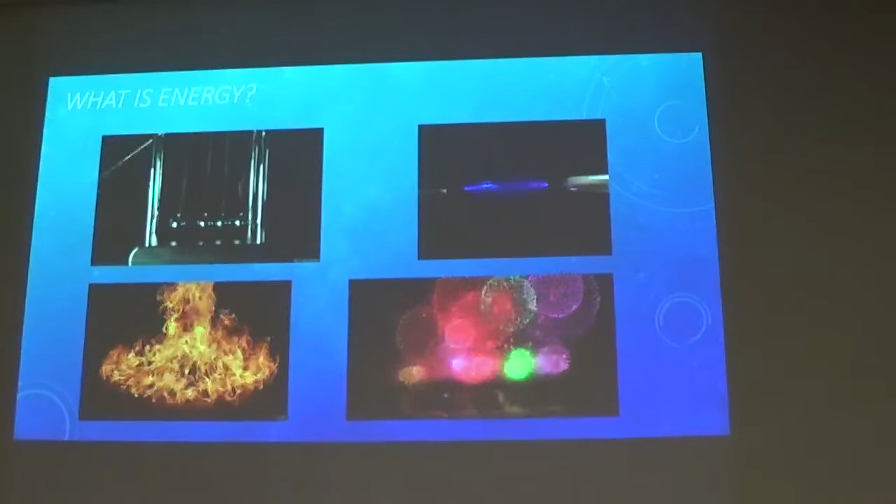The last one is a little tricky - plasma is a type of matter, fire is a plasma, it's an energized gas. Chemical energy is the energy that is bound up inside molecules and atoms when they bond together and the bonds break. The simplest example is the baking soda vinegar reaction. When you mix those 2 together, they release carbon dioxide gas, they release some heat, and you don't have baking soda and vinegar anymore - they've changed. That's the energy involved in chemical changes.

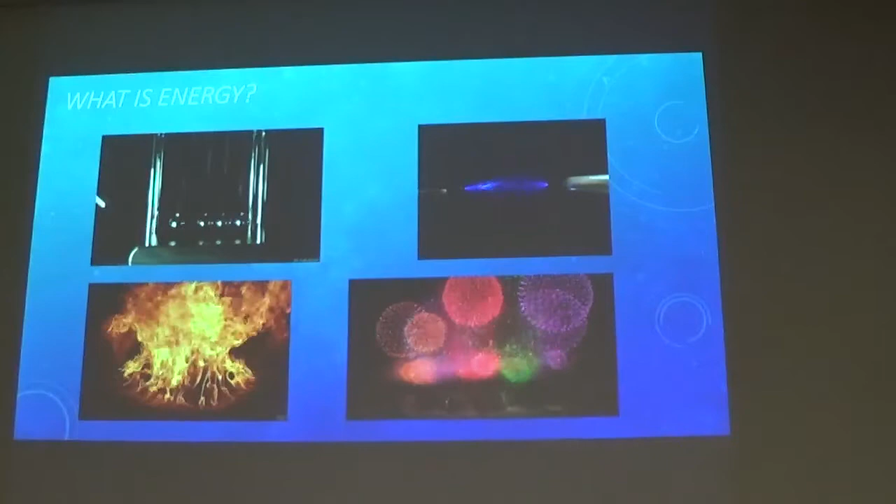Those 4 are very important to how we get our power in our house. So where does the energy in your house actually come from? Do you want to plug in your phone or watch TV or use your computer? Where is it in your house? You've got wall outlets. Everyone just sort of sees, you got a wall outlet, you plug it in, everything's great. But where does the wall outlet actually get its power from?

Through the power lines, yes. Yes, through the power lines. Hello, hi, is this audience? Yes. We're still at the beginning, nothing too complicated. So do you know where the power lines get their energy from? Is that what you were going to say? No, I stole it from under you.

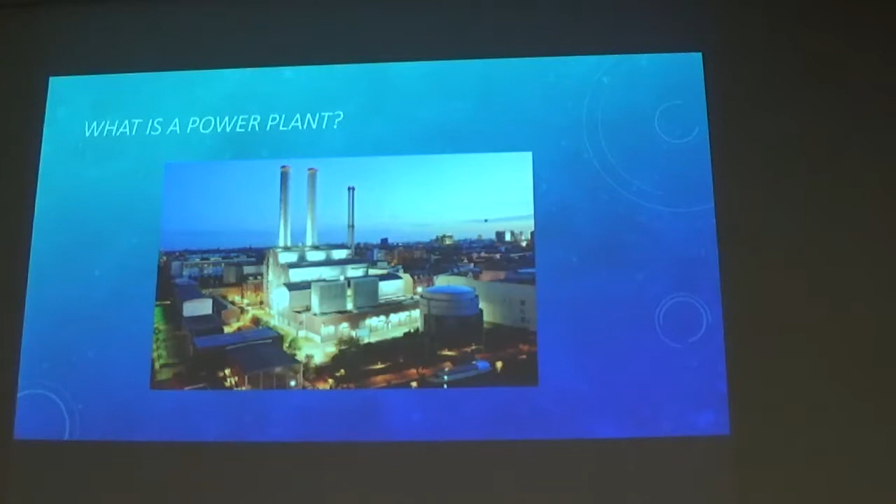Yes, the energy in your house eventually all goes back to a power plant. So what is a power plant? A power plant is basically an electricity factory. This is one, I believe, in Germany. It's quite new, quite clean, very modern. So how does a power plant work? What is going on in that building?

There are several different kinds of power plants. We're going to go over different kinds and describe how they work and what the breakdown is. This is an example coal power plant, a very simple one. Oil plants are similar, natural gas plants are similar - they all sort of start with a fuel. In this case we're using coal. The way that you get power out of coal itself is a chemical, or a set of chemicals.

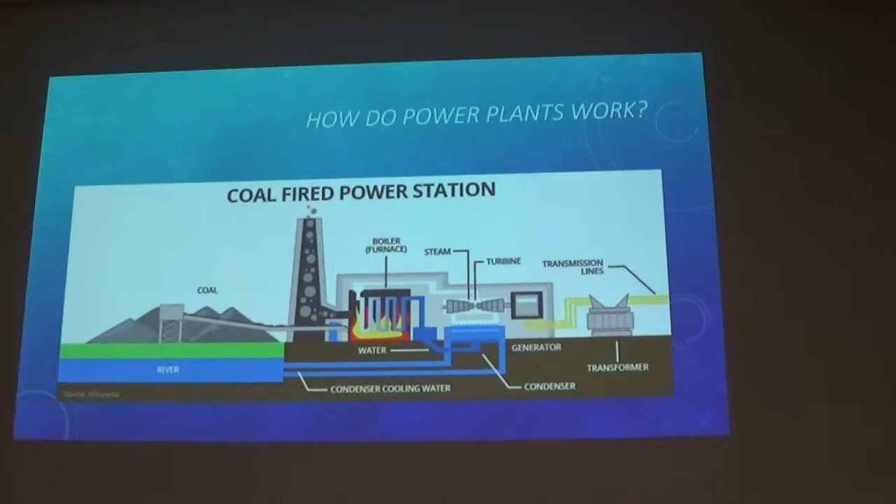Everything's made out of chemicals. All of matter is made up of things called chemicals. So if you ever hear anything about your food has chemicals in it, of course it does. Everything does. And what we do with this is a special chemical reaction called combustion.

If you've ever been camping and you're cold and you need some light, this is a very good way to get some. What you've got here is a hydrocarbon, which is a molecule of hydrogen and carbon. It's pretty simple, about the simplest thing you can burn. You combine that with oxygen, and you'll get carbon dioxide and water vapor.

If you've ever seen wood outside, you know that you put wood on the ground, it's not going to burst into flames. You have to get it hot first. So that's part of what goes on here, you have to heat this up. And as long as you have heat, fuel, and oxygen, the fire's going to keep going.

If you throw water on it, that takes away the heat. If you throw sand on it, that blocks the oxygen. And if you run out of wood, then you run out of wood. So there's lots of different things that you can burn.

It's not a challenge, you don't have to try it. But there's propane, which is in your gas grill. You've got methane, which is very similar. And this is cellulose, which is a sugar. Sugars are used by plants and animals to get energy from. Essentially, they even come with the oxygen already in there, so it's very energy dense. It's easy to burn and gets you a lot of power when you do burn it.

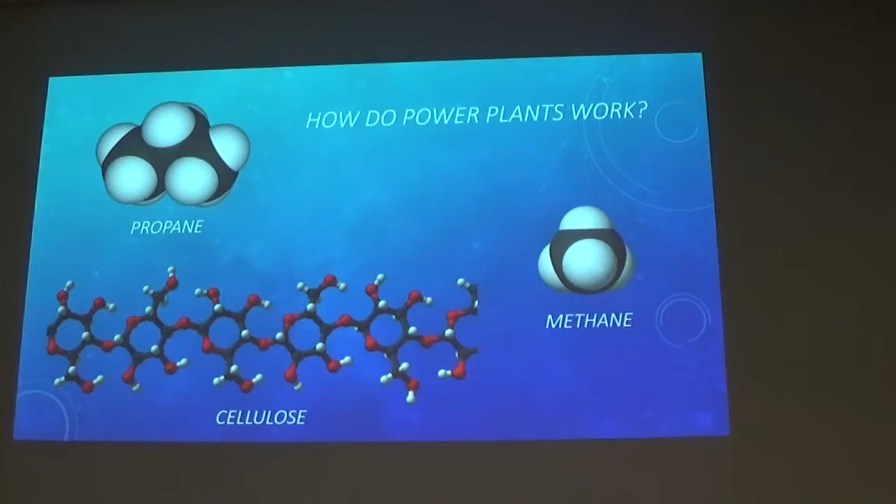So we've got over here, this kind of spoils it a little bit. We've got the furnace here where we have a fire. Hey there, sorry, we're not too far in. It should still make sense, I missed the important parts at the beginning.

So you just said cellulose is really flammable. Yes. Because I have cellulose insulation in my house, is that a bad idea? Blown cellulose, it's a process.

Okay, so this spoils it a little bit, but if you're going to try to make pasta, or you're going to make something on your stovetop, and you put a pot of water on a hot stove, what happens to the water?

No, this is very, sorry, yeah, in case you missed the beginning, it's very back and forth. So yeah, audience participation is encouraged. Yes, and you say, what? It does, yes, it will boil.

So what we're doing here is we are taking this chemical energy that's in the coal, and we are burning it, so now we have thermal energy. We've changed the kind of energy. You can't actually create or destroy energy, that's thermodynamics, you can just change what type it is. So we've gone from the chemical energy in the coal, and now we've got thermal energy over here. We're going to boil that water that's in this, we're getting it from the river, and it is going to boil over here. Yeah, here we go.

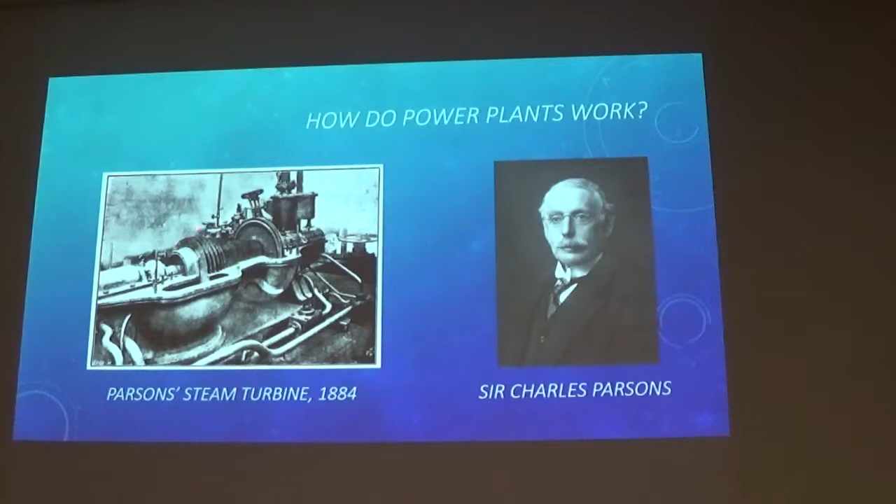So this is a very smart man, Sir Charles Parsons, from back in 1884. He invented the first steam turbine. Now what that is, is a set of these, they're almost like fans, you can kind of see them here. These all have rows after rows of blades, and what they do is they boil the water, and when water boils, it turns into a gas.

It takes up a lot more space. So if you have a small vessel that can only hold so much material, and you add steam, which takes up more space, it's going to increase the pressure. So what they do is they take that pressure and blow it across all of these fan blades. This is actually moving, it's hard to see, but all of those wheels are going to spin, and they're going to move that central axle.

Does any water touch the turbines, or is it all steam? There probably is some condensation. I'm not sure exactly how hot they get the steam before they put it in there, but I think the idea is to not have it cool down. So this over here, the condenser, that's where you're meant to cool the steam down, so that's where it turns back into water. So it shouldn't be getting too wet.

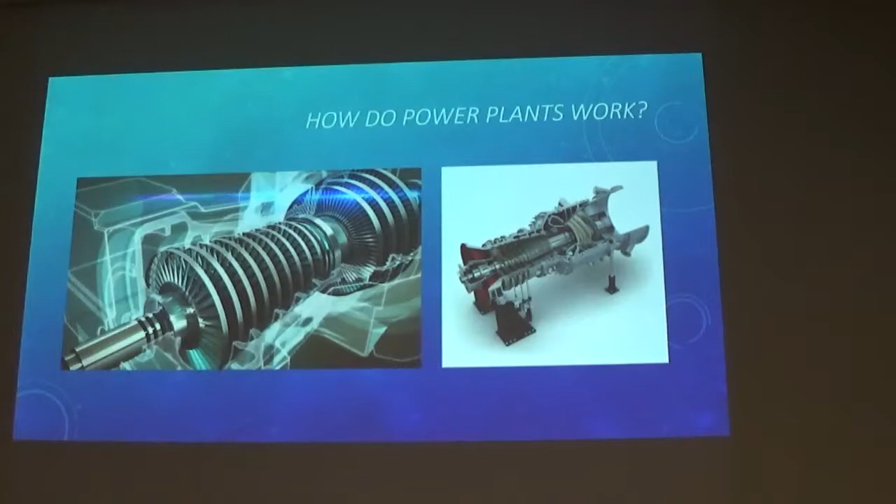It's all very hot. So what are we going to do with this spinning axle? We initially had coal for chemical energy, burned that to get thermal energy. Now we're spinning this turbine to get the energy of moving things. Now it's mechanical - we have stuff moving, we've got this turbine spinning.

This man, Michael Faraday, you may have heard of him. If you've been to the Museum of Science lightning shows, they talk about him during that - he's very important to the lightning show. He discovered, back in 1831, that if you spin a copper disc in between magnets, you actually get electricity moving through this wire, because I mentioned this in the beginning, electromagnetic energy - if you have moving magnets, you're going to get electricity. If you have moving electricity, you're going to get a magnetic field. So he found out that you could actually get one from the other.

So he was able to take mechanical energy of a spinning disk and turn it into electromagnetic energy, which is very useful. Now we've made better versions of Faraday disks. His was maybe enough to power something like a Christmas light for not very long - they weren't producing a lot of electricity back then. Now we have to provide power for people's houses, and that's a lot more effort.

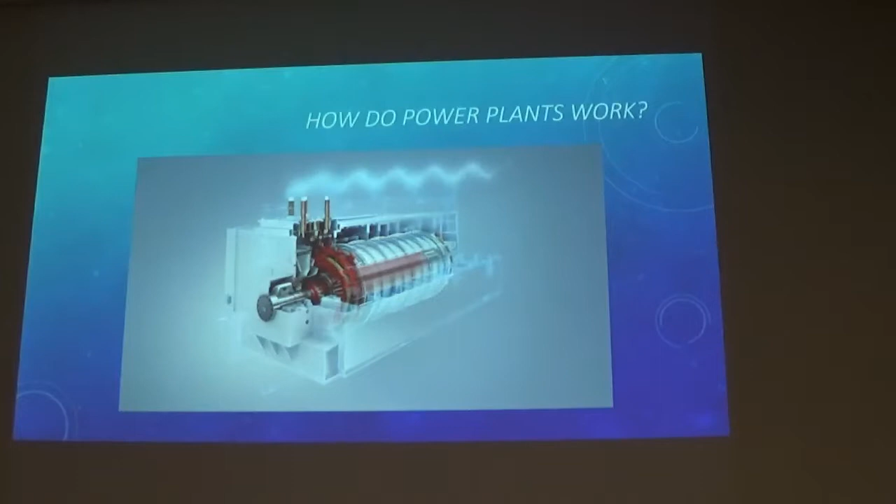So this is, I believe, called an alternator. The newer ones actually have a new name. There's one in your car if you have a combustion engine car - if you have an electric, you do not have an alternator. And so that's the breakdown: we got chemical to thermal to mechanical to electrical.

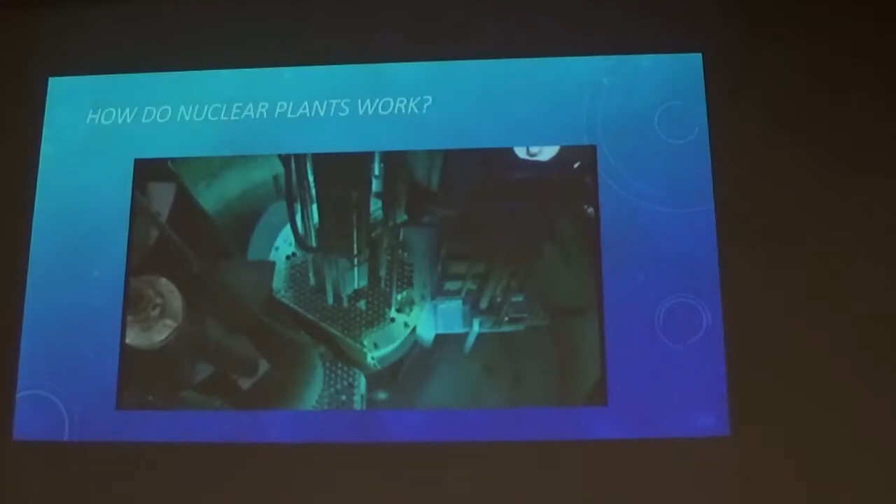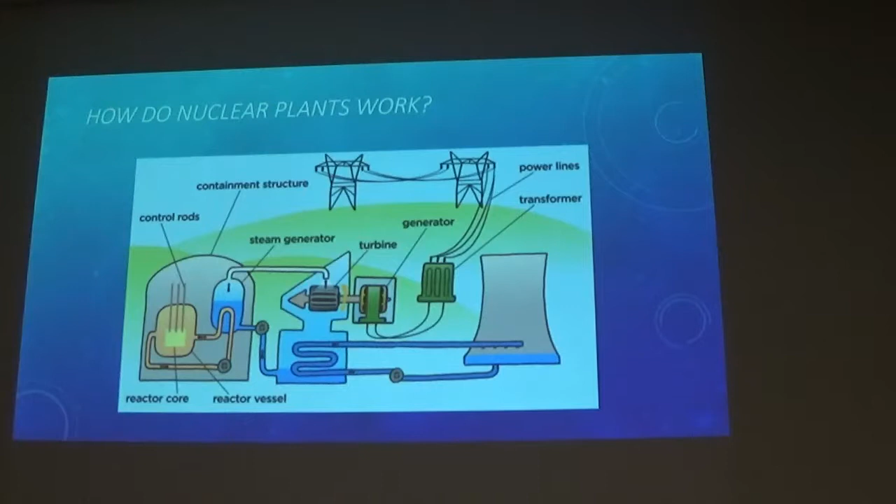There's one other kind of plant that operates mostly the same way once you get past the beginning, and that is the nuclear plant. There's one up in New Hampshire, not that far, and they work very similarly. So you see, we still have the generator, we still have the turbine, we have a boiler over here, boiling water, it comes around. The only difference is how we get heat out of the fuel, which is uranium for the most part.

So who's heard the word isotope before? Oh, excellent, I have less work to do. I'm sure I have, but I probably forgot - yeah, it's one of those things that doesn't come up too often.

So the number of protons in an element determines what element it is. If you have 92 protons, it's always going to be uranium. There are electrons flying around the outside - they don't determine what element it is, they determine what ion it is. We're not using ions. What we care about is the isotope, which is how many neutrons there are. Neutrons are neutrally charged - protons are positive, electrons are negative, neutrons are neutral. That doesn't mean they have no charge. They have a positive and a negative, and they kind of don't really know which way to go, because they've had some of each.

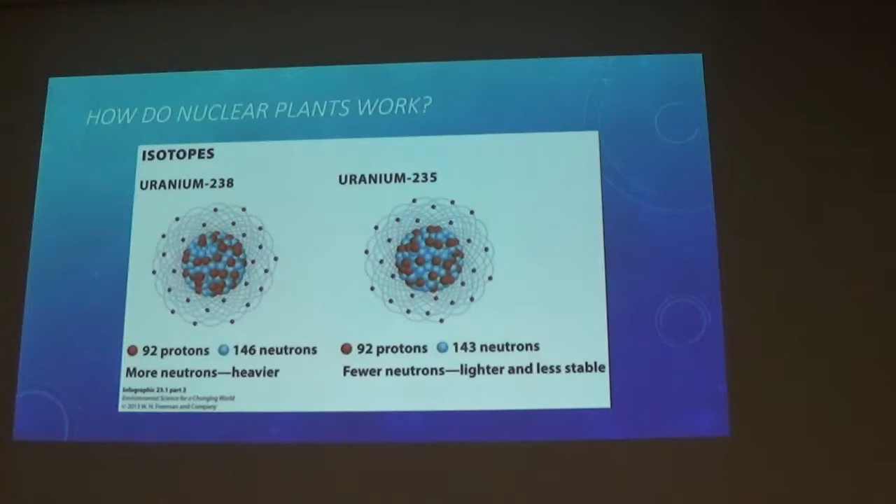So this number up here, the 238, is just 92 plus 146. This one, uranium-235, has fewer neutrons, and it is lighter and less stable, which means that if you smack it with another neutron, it turns into uranium-236, which basically explodes immediately. It's extremely unstable. It fractures into a couple different pairs of atoms, so all that has to happen is that this number down here, for krypton is 36, for barium it's 56. Those just have to add up to 92. We don't care what they are.

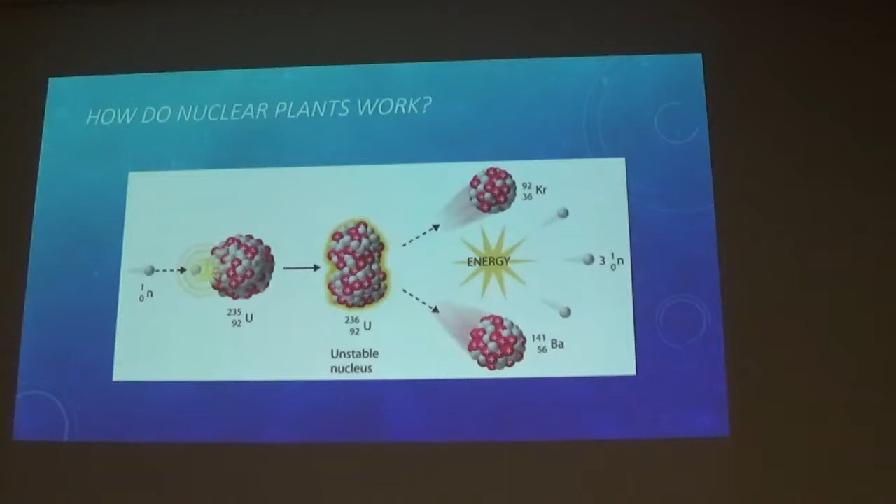It's like if you try to break a cookie in half, you're not quite sure where it's going to break - there's a couple different options. And it releases a lot of energy as heat. Everything gets very hot when this happens. And you get more extra neutrons that fly out and hit other uranium atoms. So that's called a chain reaction - that's a phrase that you will hear about other things, but that's what originally a chain reaction was.

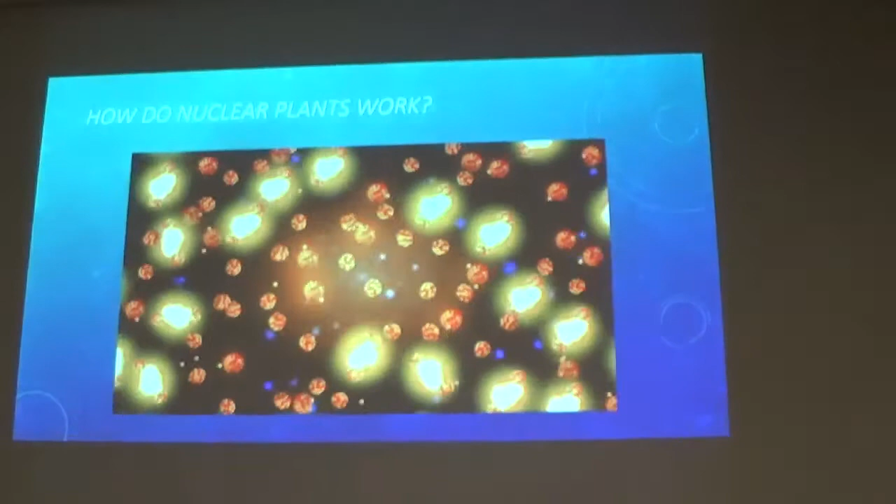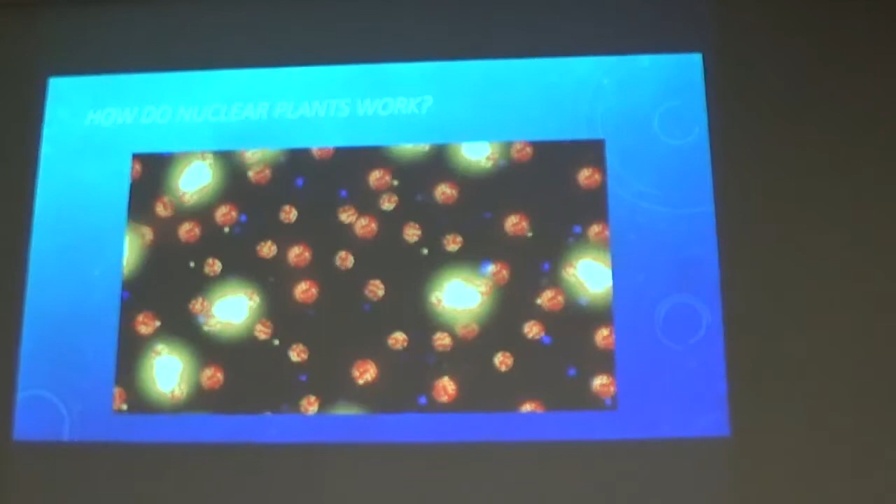So the neutrons fly out, hit more uranium atoms, then more of them fly out, and they use control rods that block the neutrons so that they can keep things under control where they want it. They don't have any disasters. This is just to show you, there are all different combinations you can get of different elements that add up to 92.

Has anyone heard of the term half-life? And do not say the video game. Yeah, yes, so that's a thing.

Half-life is a lot of the reason we care about the dangerousness of spent nuclear fuel. When we burn that uranium and get all those other elements out of it, it's still radioactive. It's very dangerous, it's toxic, you can't even really go near it. You don't have to touch it even, just going near it is a bad idea. Half-life is why it is so dangerous. Half-life is the amount of time it takes for half of your radioactive stuff to decay into something less radioactive. So from 1 to half, half to a quarter, quarter to eighth, it's the same time period. You never quite get to 0, but it gets there pretty safe eventually.

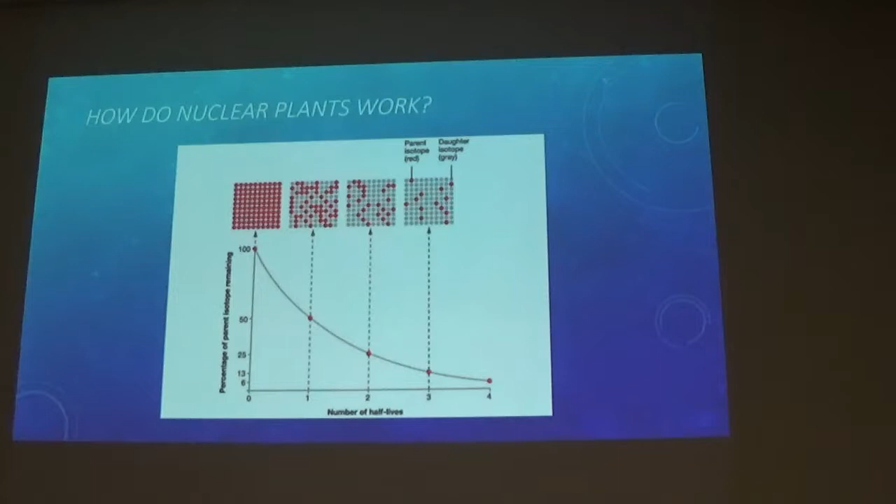The reason those are concerns sometimes, I'm not going to go into all of this, but you can see examples here: uranium-238 has a half-life of 4.5 billion years, which is a little bit old. So of all the uranium that existed when the Earth formed, half of it is gone. It's decayed, first it goes to thorium. Thorium's half-life is 24 days, so there's a big mismatch there. You get these elements decay along this chain, and they're very, very different - 4.5 billion years, 22 years, 1,600 years, 27 minutes for some.

1/1000th of a second for polonium-214. It barely exists for even an instant, and then it immediately transitions away. So the problem is that some of these things hang around for a very long time, and they stay dangerous for a very long time.

Do you want to take a picture? No, go ahead.

So what happens, the way this works is, you can see these alpha and beta symbols. If there's an alpha, that's alpha radiation, which means the atom just threw away 2 of its protons and 2 of its neutrons. So it changes elements, it goes from uranium to thorium because we have a different number of protons now. Since we don't have 92 protons, we're not uranium anymore. When you see beta, that means the atom has thrown away an electron, but it didn't have an extra electron - that's a neutron becoming a proton. So you've gained a proton, and you change elements again. So you can actually go from uranium back to uranium - it's just a different kind of uranium.

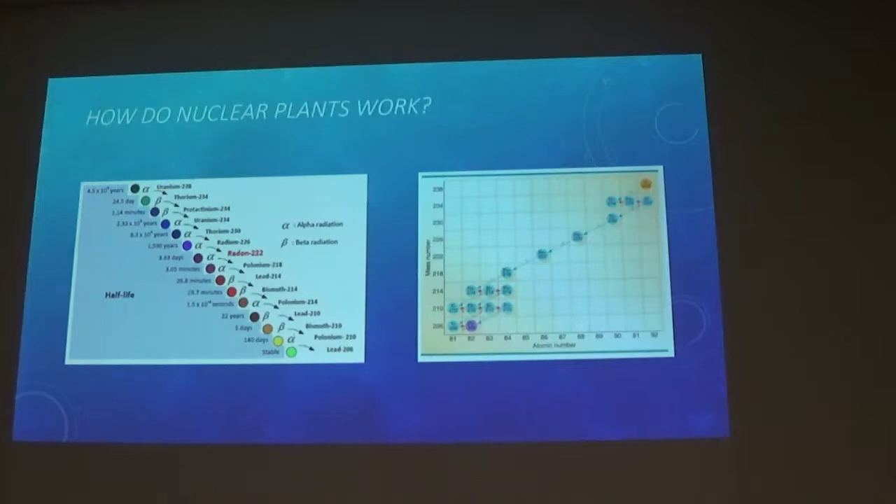Alpha particles, I think, are the easiest to block. Alpha radiation is blocked by a piece of paper. Beta, I think clothing will block it. It's not that deadly. Gamma radiation is the kind you have to be afraid of. None of these do gamma. That's not in this. I think they do make little diagrams like this that show you what type you're getting. Gamma is just a giant burst of energy that is not friendly to anything. You will not become the Hulk if you get hit with gamma rays. You'll just be very upset.

Oh yes, renewable energy, renewable in this case. So I'll explain it a bit with an example: coal. This is how coal is made.

So if you have a swamp with lots and lots of wildlife, there's lots of trees, lots of vegetation, and a lot of water. Things that die just sort of fall into the water and pile up and decay to a point, and more trees come in, and more trees fall down, and more grass grows and falls down. There's a lot going on in wetlands, they're very active. There's a couple state parks up north in the North Shore where you can go see this. It's actually really nice. You can get this stuff called peat when that piles up enough. They use it in their fireplace in Ireland, if you've ever been - it has a very distinctive smell.

So if you bury peat deep enough and wait long enough, you need a lot of pressure and a lot of heat that you only get from being deep underground. You eventually get lignite, which is a rock - it's actually stone, that peat has been compressed enough that you have actual rock now. And if you wait more time and give more pressure and more heat, you get coal.

The trick is this time bit. So if you decide you want cookies tonight at 7, I'm going to have to start making cookies at probably 6 because I have to mix everything up, warm up the oven, put everything in the oven, and then wait for them to be done. It takes some time. So if you want cookies now, start an hour ago. If you want coal now, you would have to start about 250 million years ago. So if you did not start your coal a long time ago, you are not having new coal today. It takes a long time to get this stuff.

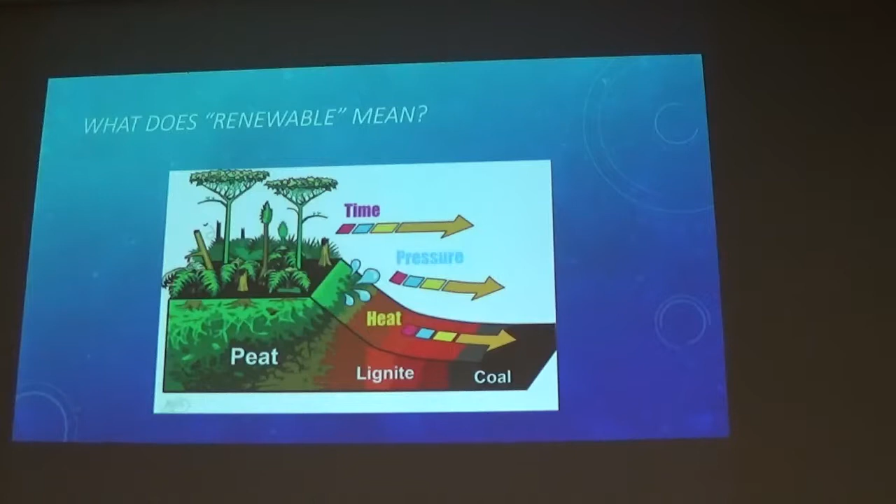Renewable just means we're generating it faster than we are able to use it up. So if you have a rain barrel in your backyard and you only use about half of it every time it rains, and you're topping it up every time, it's not telling you to use more water. But if you watch what you're doing and you're careful and you don't go crazy with it, you can probably just keep using that water and not have to worry about where you're going to get more.

So if we wanted to use the old model of power plant that we had, where we were burning coal - is there anything anyone could think of that we could burn instead of coal? It would be a little bit more renewable.

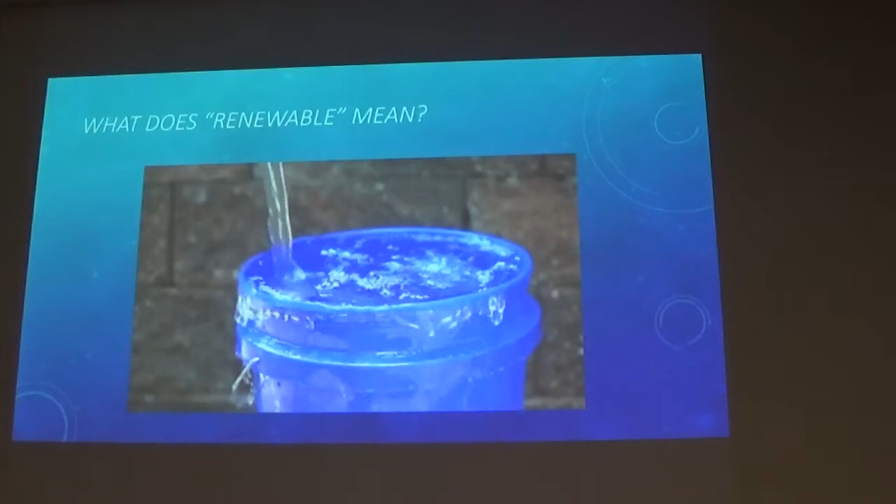Oil takes a long time too. Oil is also a fossil fuel, so oil, natural gas, and coal all take a very long time. Probably wood, wood is a good one.

Water. Yes. Water doesn't burn. Oh, sorry. No, you were looking at water. I can see why you would say water.

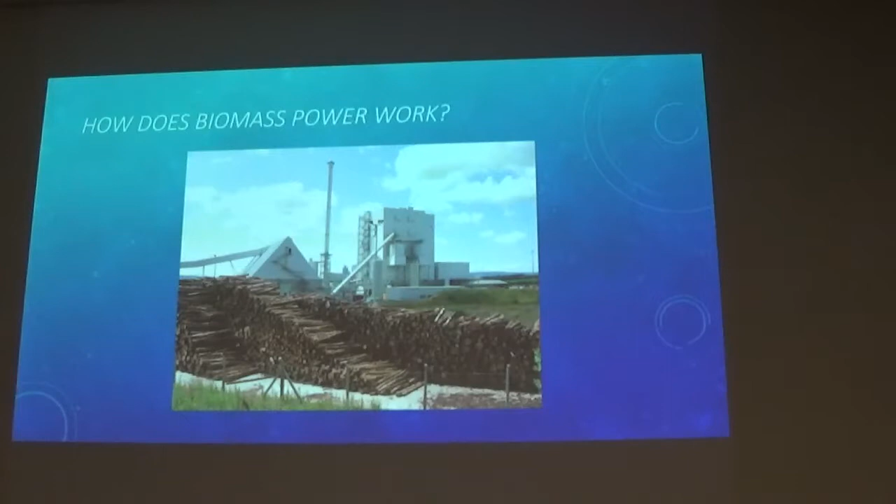So we refer to wood in this case as biomass. This would be a biomass plant. And what they're able to do is gather up all kinds of extra garbage plant stuff that we're not going to use. So at farms, they can say, oh, we have extra corn stalks, corn cobs, all these things we don't need, we stick them in a bag and ship them off to a plant.

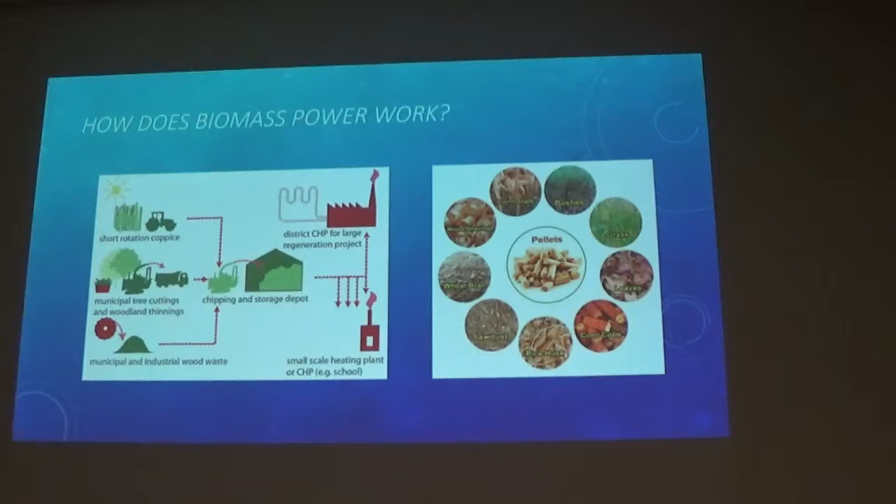If you ever had to rake leaves, mow the lawn, or trim the bushes, now you got sticks and everything, you just put them in a bag and the town takes them away. They can take it to a biomass facility. If you have a wood shop, you're going to have a lot of sawdust and wood shavings, so you can use those, and they compress them into little pellets that you can burn more easily, and you put them in a stove. And a lot of people will say, well, if you're burning stuff, you're going to get carbon dioxide, and that's what causes global warming, right?

Yes, but the thing is that when we are burning fossil fuels, which are coal, oil, natural gas, those were buried, those were out of the picture. They were way, way underground, and they weren't moving around in the air. They were completely out of the picture.

Trees are actually made of air, which the first time someone said that to me, it blew my mind a little bit, but trees do photosynthesis in their leaves. That's what the green color is for. It's from chlorophyll, which plants use to take carbon dioxide from the air, water from rain from the ground, and sunlight, and they create tree out of that. Wood is just solid air, which is kind of crazy, but that's how it works.

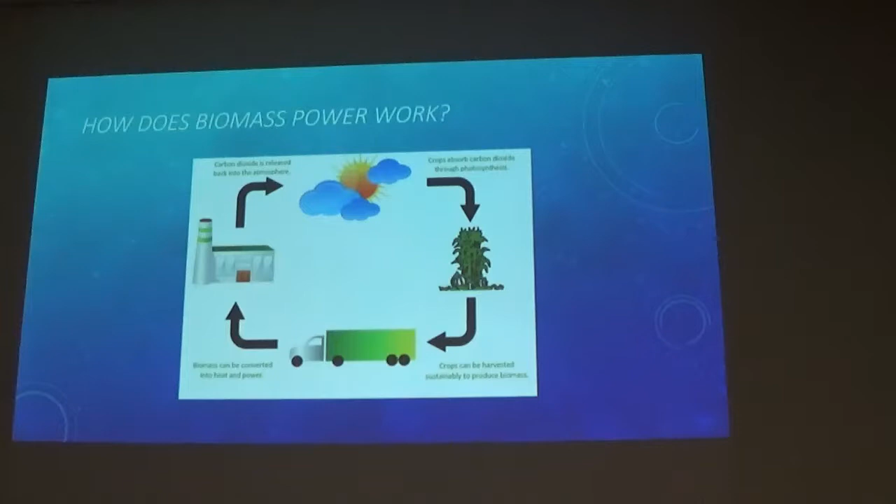So when you burn a tree, or what's left of it, say a tree falls down in your town after a storm and they put it through the chipper, now they're just going to throw it away. What we want to do is take that and use it before it just rots, because that carbon is going to go back in the air anyway when the tree rots. So we're thinking, could we just use what's already here? This energy is just waiting to be used and nobody's using it, so let's give that wood a detour instead of having it get eaten by fungi or bacteria or termites. So we're going to try to use it when it's already there.

A plant like this is not going to power a giant city. You're not going to power a whole state with one of these. This could be like a municipal plant in your town. You could just have this, everyone brings their yard waste, the dude with the wood shop brings in his sawdust. And we're looking at ways to take a little bit from a lot of different places, which is what we're looking to do in the future with energy.

So what he said before, when you switch types of energy, you're kind of losing some efficiency there. When you go from burning something to using that heat to boil water, what if we didn't have to ship fuel? What if we didn't have to pay the driver of the truck? What if we didn't have to mine anything or gather anything? Does anyone know another good way to just get heat? Anyone think of anything?

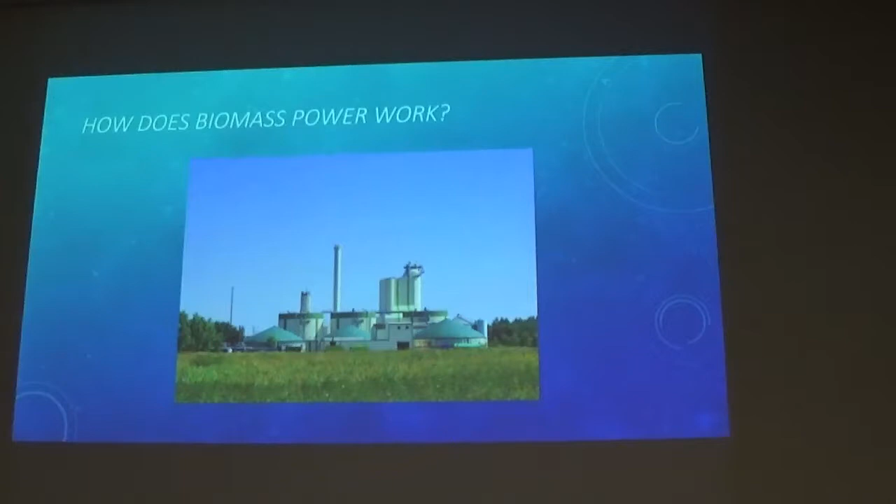So who's been to the beach this year? Yeah, so what happens when you go to the beach, you sit under the umbrella, you're having a great day, and then it gets to be late, and you go back to your car that's been sitting in the sun all day, and you open the door, and then you want to die because it's like 150 degrees in there.

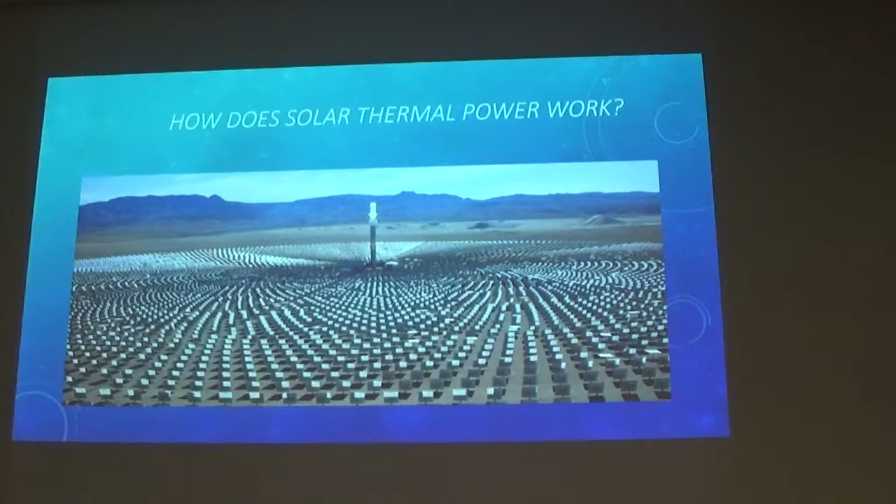That's how we get heat into a solar thermal plant. It's essentially because of the way glass works. Sunlight can get through glass, and it heats things up inside your car - your seat, your dashboard, your steering wheel. The heat can't get back out because your car is pretty sealed.

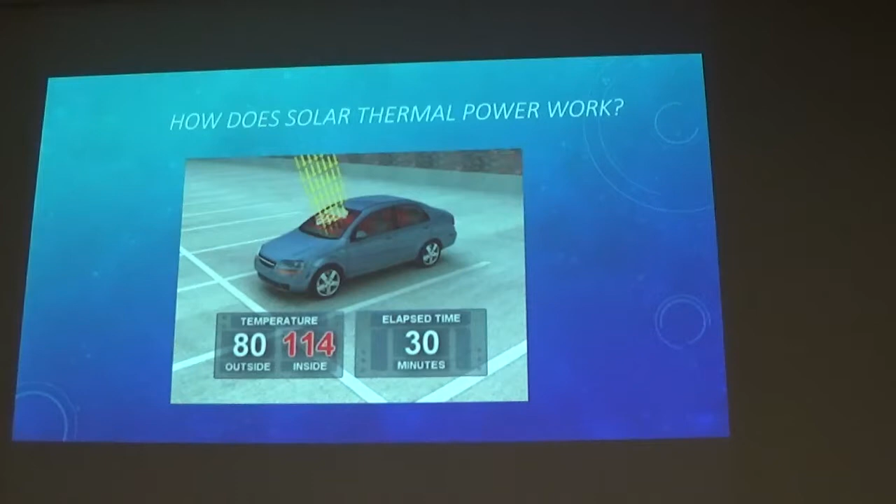That's why leaving your windows open a little bit helps, because that heat can kind of escape. But you can see within an hour it gets to be ridiculous. That's why you can't leave kids or pets, or if you bought a really nice plant and went shopping at the supermarket, you're probably down a plant. That level of heat is not good for anything, but it is good for boiling water.

So heliostat just means - helio means sun, stat means stay. So what that mirror does is, with a little computer in it, make sure it is always aiming the sun's reflection at that tower. There's a whole field of these, all pointing the sun directly at that central tower right there. And that gets very, very hot.

You can't go up there while these mirrors are all aimed there. If you threw a baseball up, it would just burst into flames. That's not a good thing to do with a baseball. So what they do is they aim all those mirrors up there, and it gets very, very hot.

What they could have done was put a boiler up there since it's hot - you can just boil your water. Then someone very clever said, well, hey, what happens at night? There's no sun. And they were like, oh right, we spent all this time and money building this big fancy thing - seems like a waste. So some chemists came up with using molten salt.

This is a mixture of a few different kinds of salts - I think there's potassium, there's sodium in there. These stay liquid at very high temperatures; they don't like to boil. When you put water up and get it to 100 degrees Celsius, it'll boil, but this salt will not boil. I think it can get up to thousands of degrees in that tower before this salt still does not boil.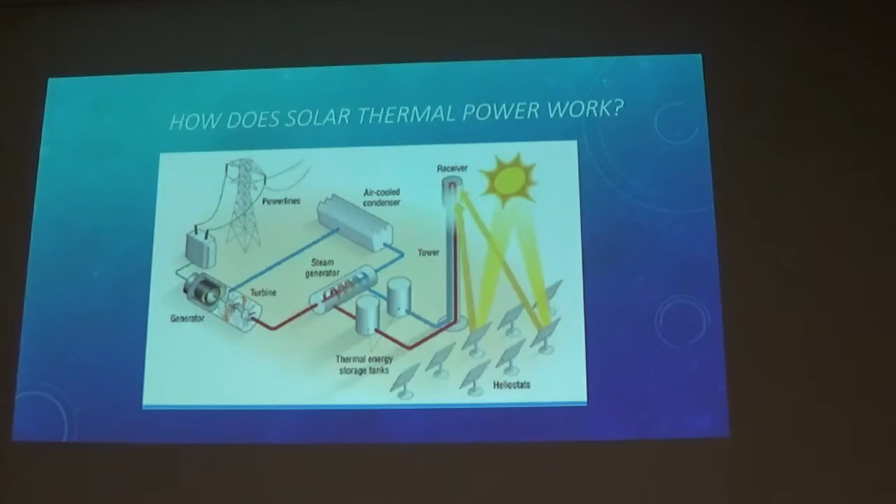These are really cool looking. Yes? If energy is lost from the efficiency of shifting between different forms, why is it necessary to have so many different forms?

It's just sort of how things developed. It was less high tech to figure out how to burn coal - that was an easy step. Everyone knew you could burn coal or whatever you're burning and get heat from it - you can feel the heat from the fire. They discovered the other steps later as they were going.

Somebody realized - Michael Faraday realized - I can spin this disc and get power. And people were like, well, how could we spin the disc without us having to do it? Because you used to have to do it by hand - he turned a crank, and he was turning a crank for maybe enough power to power a Christmas light, just sitting there for hours not really doing anything. So they were looking for how to do this without us having to do it.

So that's how they sort of came up with those steps. It wasn't all designed at once. It's sort of - the engineering word for it is a kludge, when you're sort of like, well, I have to do this thing, and it's kind of like MacGyvering something.

You know, if you know what that means, to just throw together something with what you have. That's kind of how that happened.

With solar thermal, you need a big, wide, flat area to put it in. You don't want trees because they block the sunlight. You probably want a flat horizon so that mountains don't block your view of the sun, because it needs sun on all those mirrors to work. So there are places you can put it, but there are definitely places that are better. I believe this one might be in California, and there's one in California. I think they're looking at Arizona too - there's a lot of desert there.

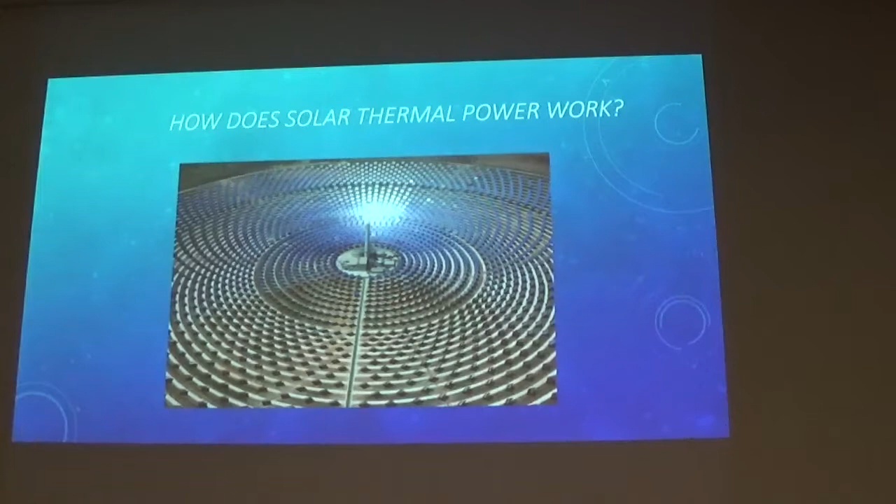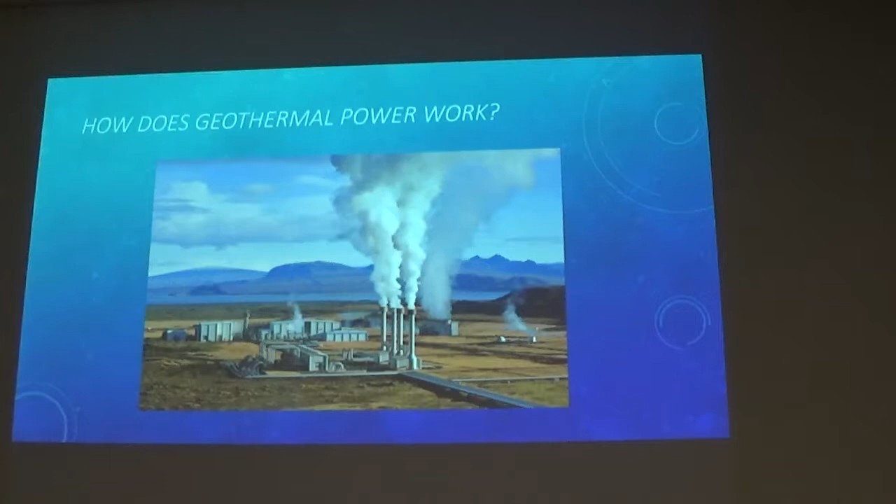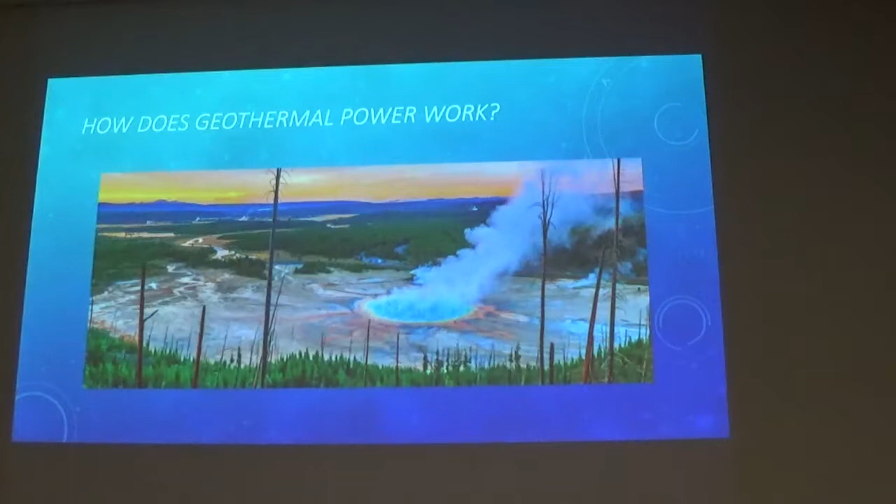So who knows what's going on in those places? Geothermal is essentially where the crust of the earth is thinner, like at Yellowstone, Iceland, or Japan. There's a layer of solid rock on the surface of the earth, and as you go further down, you get to very hot liquid rock. What's happening in these places is that the heat is closer to the surface. The lava and magma, if it gets to the surface, you get volcanoes - places like Hawaii, or Iceland again, or Italy. You get these features that you don't really see anywhere else, and they're all caused by that heat from the center of the Earth.

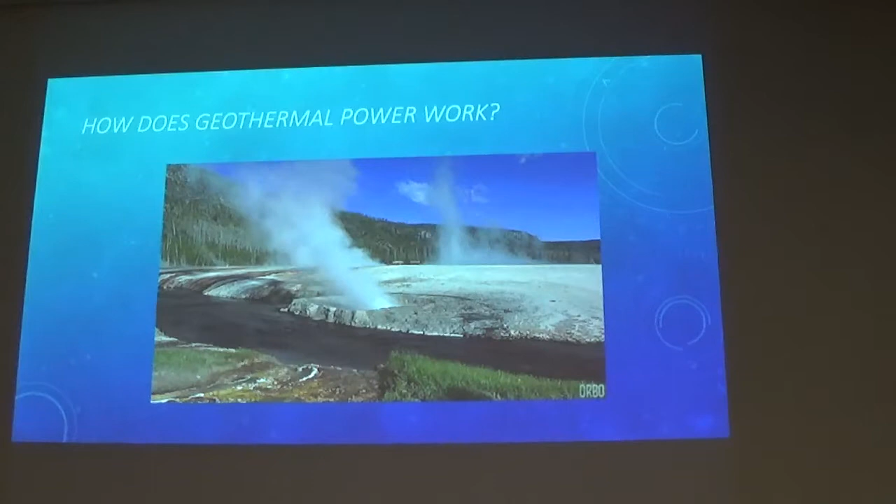And that heat is not limited - you're not going to use it up. It's there, doing these things, so you can have different kinds of geological features based on where the water is next to this heat. But these things only happen where there is a big source of heat close to the surface.

It's actually really, really easy to get power from this, because all you do is put water in the ground and it comes back up very hot. You skip a lot of having to burn things, having to ship fuel. You just put the water in the floor, and now it's very hot - drive your turbine, generate electricity, you're good to go.

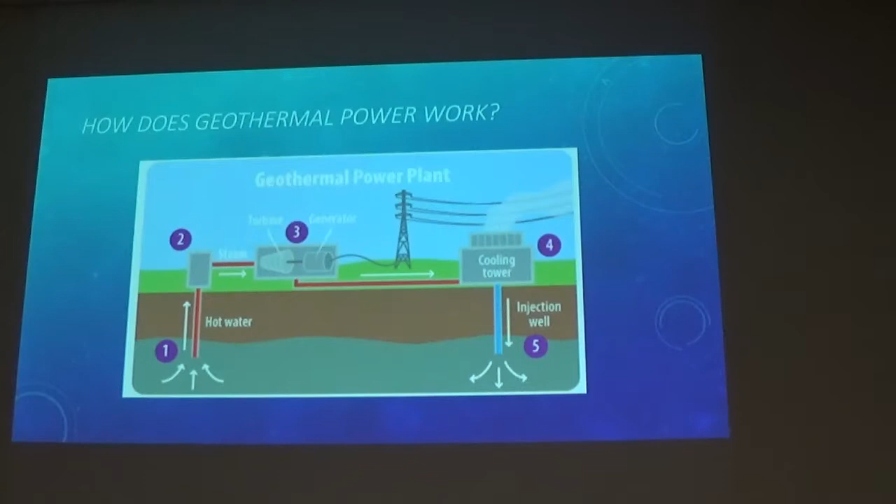So this isn't power generation, but it's another - do you know what prohibits people from using geothermal energy deeper down? Like, why can't they? Mostly cost. If you're going to try to do it in a place where the magma is close to the surface, you're not going to have to dig nearly as far, because as you start to dig further, it gets really expensive. Is it physically possible to?

You can dig very deep, but you're never going to get to the mantle. You're never going to get through the crust, because as you go down, the pressures get so great that they destroy your tools. There's a super deep borehole, I forget where it is, I think in Siberia somewhere - a very deep borehole where they took this massive drill and kept pushing it down further. The problem was eventually it got hot enough that the drill couldn't operate anymore, and it started to catch because there was so much pressure that the rock was bending.

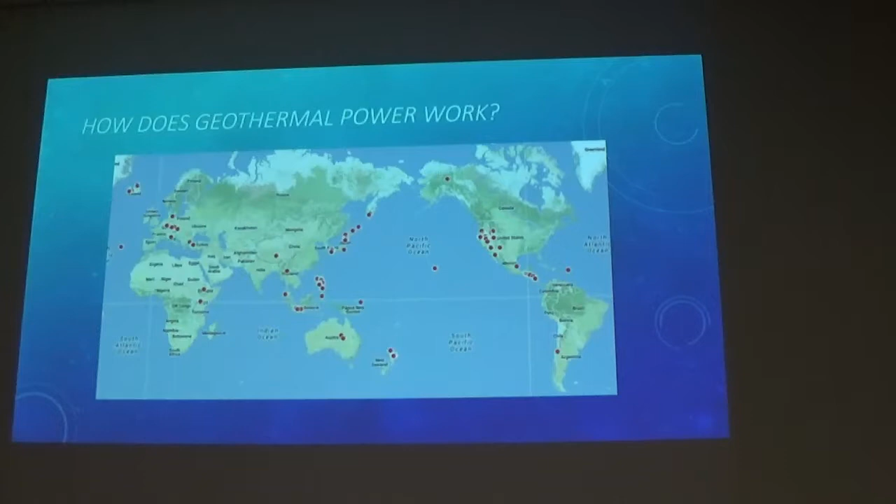There are some things you can do at home now. If you have ever heard of a heat pump, they have geothermal heat pumps for your house that if you dig far enough down, it's about 68 degrees all the time. So it never changes, yeah Fahrenheit, just comfortable room temperature.

It gets very different at different stages. It's like it's 50 here, it's 60 here, it's 68. If you go to the right depth, you can get 68.

That's the idea with this: in the winter, you chill this fluid with the cold air in your house, send it down to the ground where it's warmer than it is in your house, and bring it back up and use that to warm the air a little bit. Heat pumps don't use much power at all, so that's a lot easier than trying to run an air conditioner or a heater. It works the opposite way in the summer because it's still 68 down here.

You ship your 90-degree, hot, humid day air, use it to warm this fluid, bring it back up, and it's a nice 68. So one of the important things about renewable energy is learning how to do more with less, how to be more efficient. A heat pump is a lot easier to power than an air conditioner, central air, or central heating. It's still kind of pricey to dig down in the first place, but it's an option that we have.

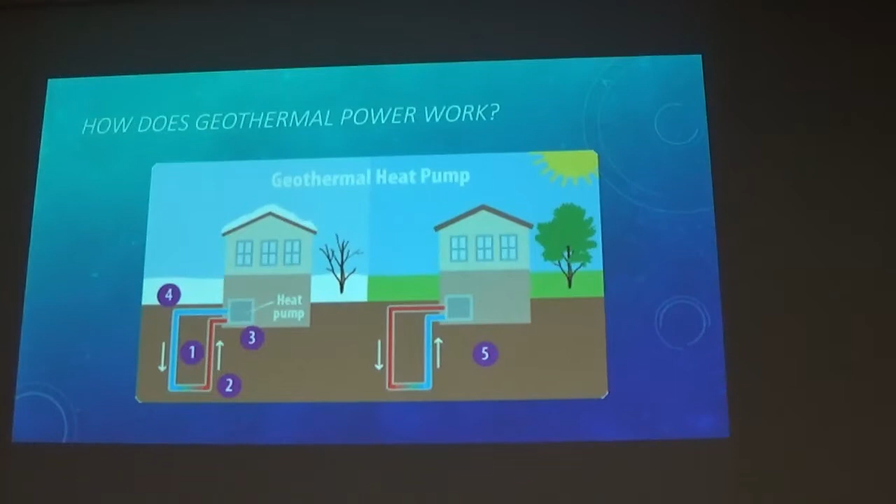Well, spoilers. So, who knows what this is?

So what we're doing here is we're going to try to switch energy types fewer times. Instead of having to heat up steam to drive a turbine, we're just going to drive the turbine by ourselves. So we can do that with the wind.

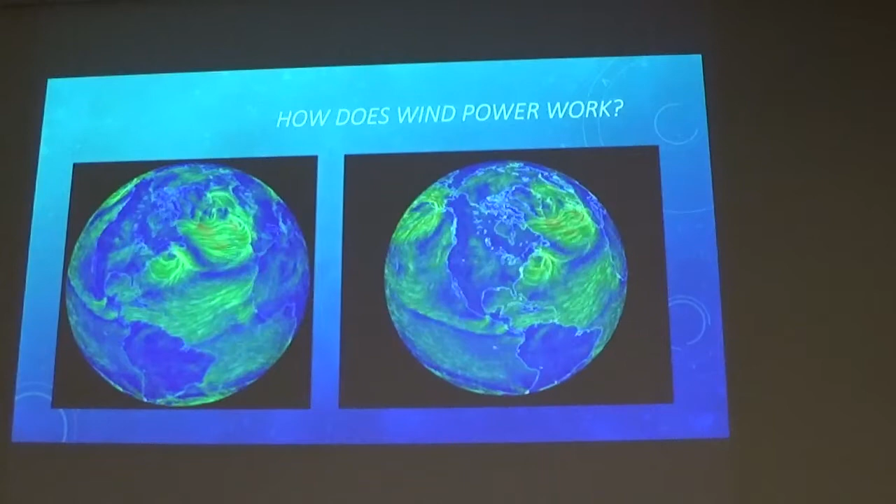The wind is always moving. It's never going to go away. As long as there is air on the planet, there's always going to be wind. And that happens because there are different temperatures in different places.

When you have a nice bright sunny day, that's usually a high pressure system where air comes down and goes out from there, and it spirals around. And when you have an updraft in a storm, that's low pressure, and that sucks air in. You notice whenever you have a thunderstorm, it gets very windy. That's part of why.

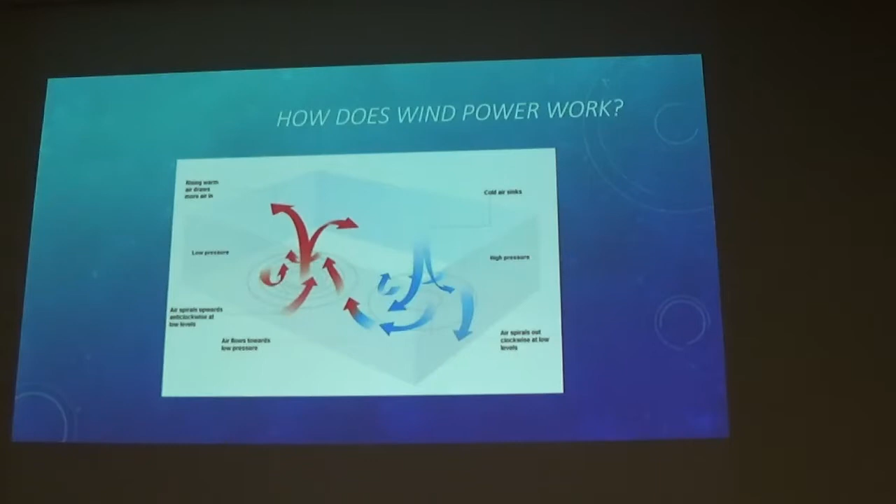These processes are always happening. All you really do is you stick a turbine on top of a pole. You just put a generator on top of a pole, put some propellers on there, and you're good to go. Wind blows, turns the turbine, you're all set.

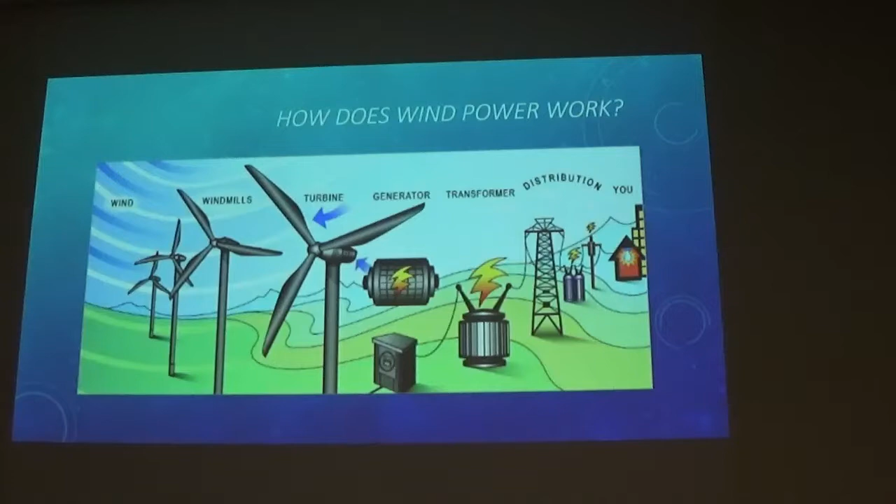So the idea, again, is to decentralize how we're generating power, a little bit over here, a little bit over there, and that reduces the strain on the system, makes everything a little more robust. It's like everybody doing their part, working together.

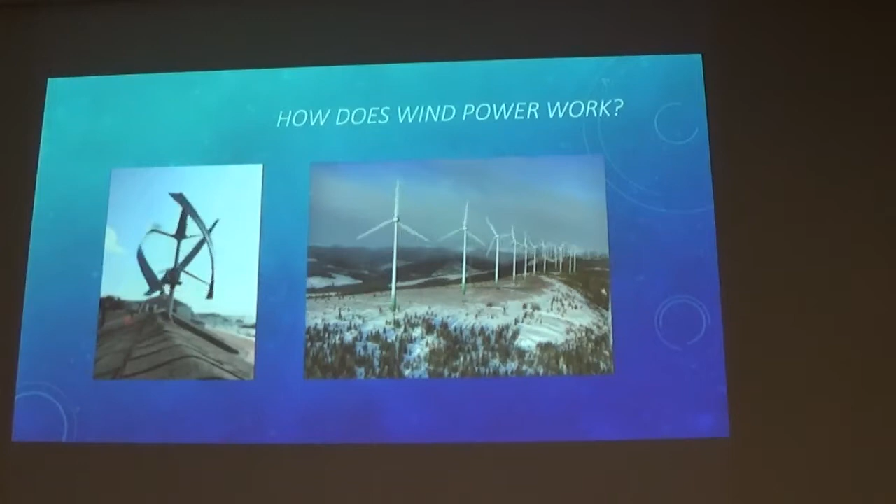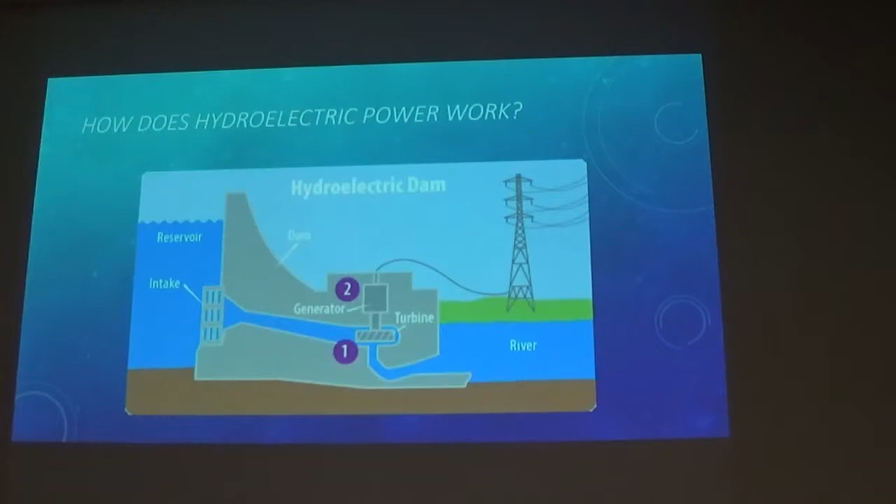But rivers are always going to exist, and they're generating power whether you're there to capture it or not. There's other ways you can even have small turbines that work like wind turbines, just in a river. And because water is so much heavier than air, it presses with a lot more force, and this turbine doesn't need to spin very fast.

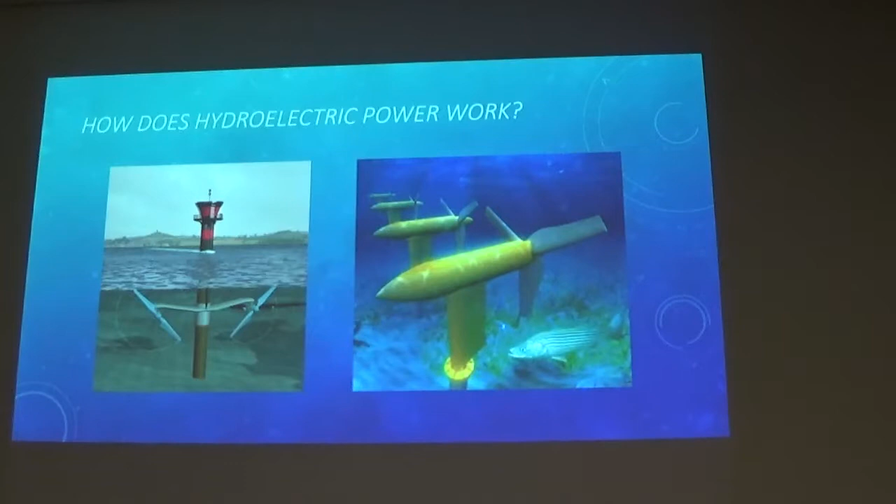There are other ways that you can get power out of water. Aside from rivers, what's another very prominent way that you often see water moving around?

So tidal power is indeed a thing. There are a lot of different ways that you can get it, but the reason tides happen is because of the gravity of the moon. It pulls the water more than the Earth does, and you get a sort of bulge of water. The moon is going to keep orbiting the Earth, and that is going to keep happening for quite a while, as far as we know.

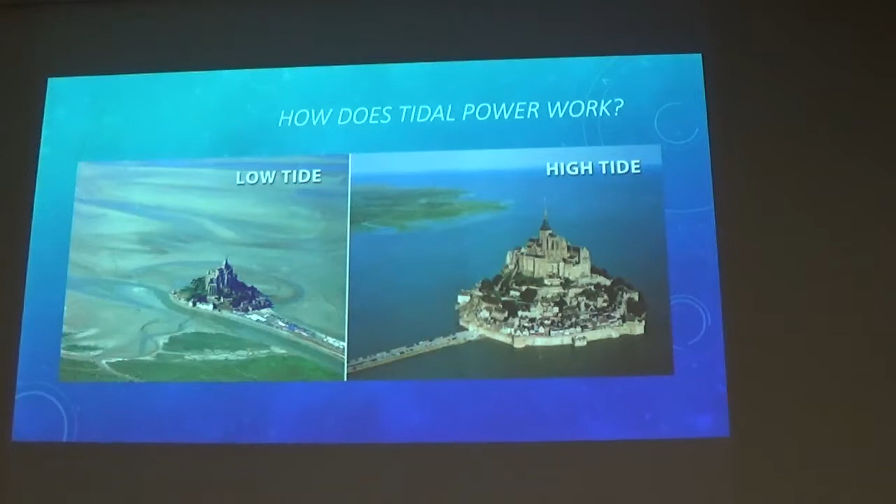In some places you can see that—I believe the Bay of Fundy is very, very prominent, with a big difference between high tide and low tide. Mont Saint-Michel in France also has a very big difference between high tide and low tide.

So what you can do is gather that power by building a mini dam. When the tide comes in, it refills this segment and you get power going that way. When the tide goes back out, it goes the other way, so you're able to get power out of this both ways.

These can get very expensive if you build a big one, so a lot of times you probably want to build a small one off to the side, so you worry a little less about the huge construction costs you can rack up building a very large one. If anyone's seen the Three Gorges Dam in China, it's very expensive to build large projects like that, so you probably want to stay small with these. That's part of what we're trying to do with energy in the future anyway—decentralize things so you're not relying on just one plant.

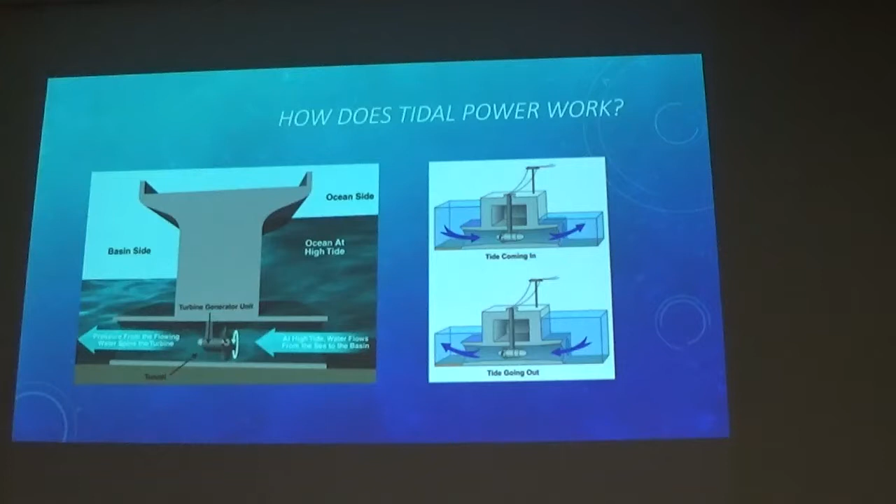Whoops, spoilers again. Then there's wave power.

There are a lot of different ways to do this. The ocean is always going to have waves—that's how water in large bodies works. This one, I believe, is called a Pelamis.

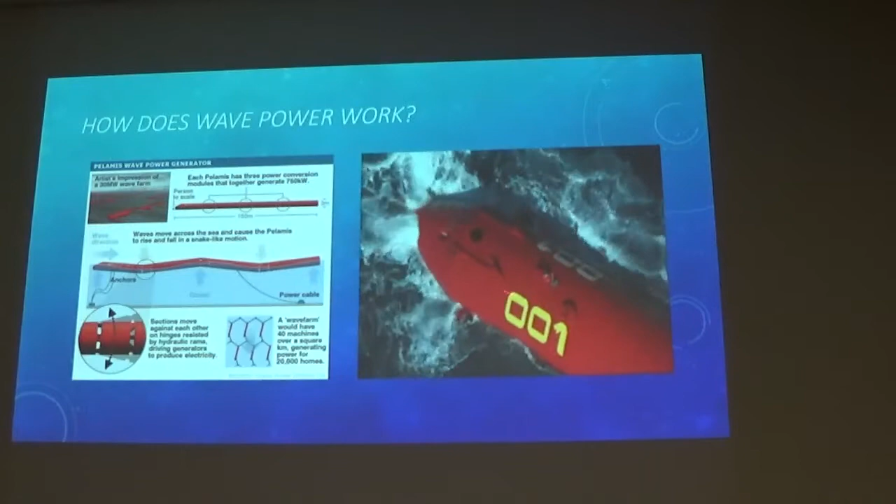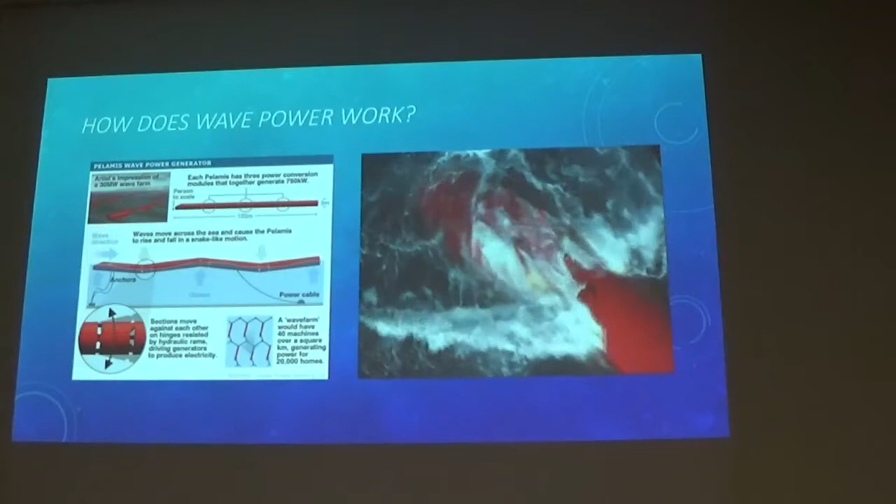As these segments move around and snake back and forth, they generate power at the anchor points, at the intersections. So as long as there are waves going past this, it's going to be moving, it's going to drift around, and it's going to generate some power.

You could also go with a buoy. If you've ever had to start a gas-powered lawnmower where you pull the cord and it doesn't start, that's kind of how that works. Every time the buoy goes up, it pulls on the cord, and when it goes back down, it lets it back in.

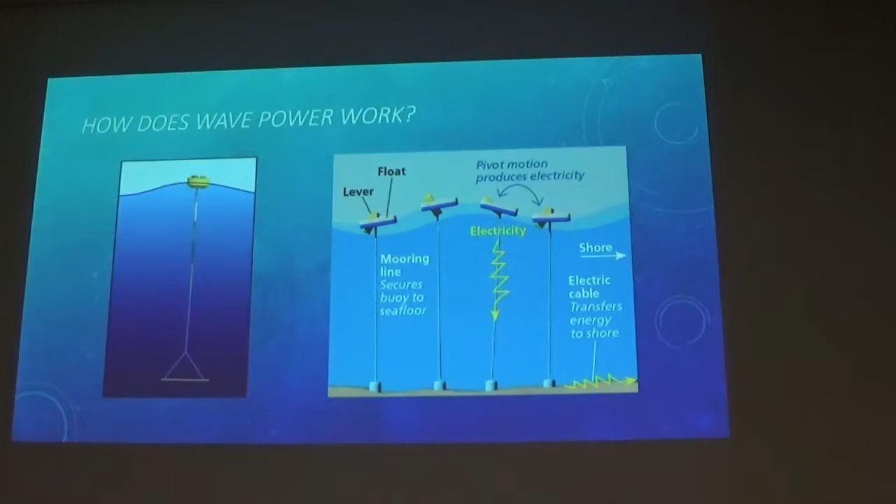There are also models that use a little float that will move relative to the buoy, generating a bit of electricity. You can have as many of these as you want, you just have to watch out and make sure boats aren't going to get tangled in them, things like that.

I believe this one was called an oyster or a clamshell or something like that. The idea is that when the waves go by, the float at the end gets shoved back and forth, and you're generating power in here. They show these little cables—yep, there it is.

You want to be careful with things like this, that you're not making a lot of noise that's going to disturb whales or dolphins. And if you're going to have a lot of barnacles or mussels growing on it, you'll have to think about how that's going to affect the ecosystem. But there are a lot of different ways to go about this.

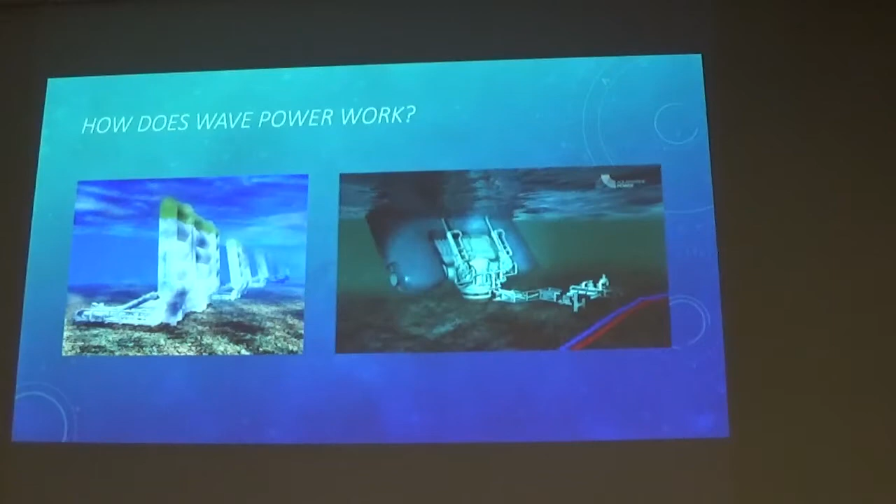So we were talking about not having to switch forms of energy over and over again—we're still doing mechanical into electrical.

So this is a good way to not do any of that. Nothing moves, nothing changes, there's no chemical reactions, there's no water being pumped around. This is just, here is electricity because the sun is out.

So the way a solar cell works is that you have two layers of silicon wafer. One has more positive charge, one has more negative charge. And when the sun comes out and throws photons, the particles that make up light, when a photon comes down it'll smack into an electron, and the electron will get knocked into the zone it doesn't really want to be in.

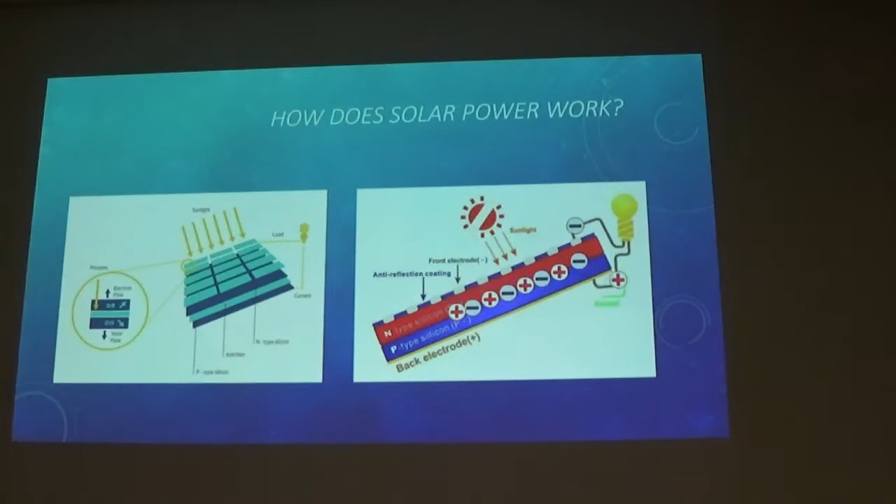So we give it a path over here. The electron just sort of wanders around and goes through, goes back, and now we have electrons moving, which is how we get electricity. That happens every time a photon hits one of the electrons. It winds up where it doesn't want to be, it goes back through the path that we gave it, and we get a little bit of electricity out of it.

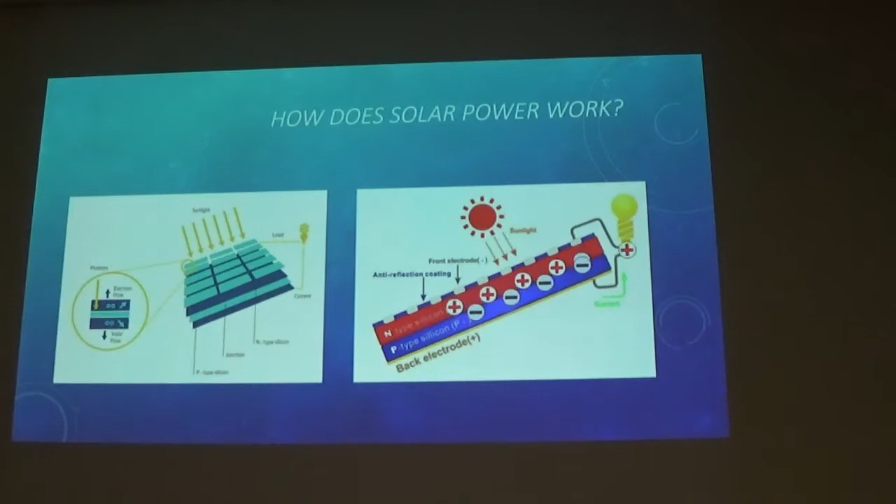It's only a little. An individual solar cell does not generate a lot of electricity. You can sometimes buy little kits that'll have them for if you're going camping and want to charge your phone while you're out in the wilderness.

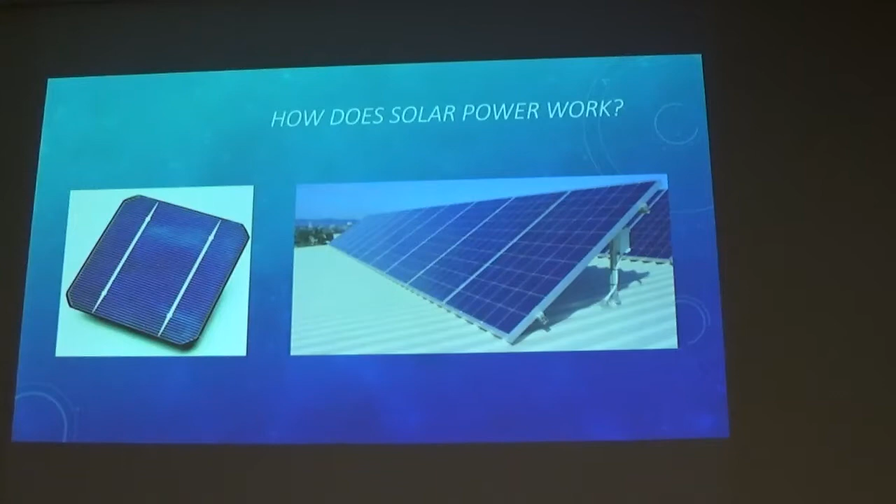But each individual cell is not going to give you much, so we put them together into solar panels. These are what you see on people's houses, sometimes in fields, things like that. You sort of just throw more at the problem. If one only gets you a little bit, you just make more of them.

And the cost associated with making solar cells has gone way down. So we're a lot more able to make these big solar farms that can provide a lot of power all the time. And there is maintenance. You do have to clean them so they don't get too dusty. And they do eventually wear out, I think, but there's new technology that's making that a little bit less of a problem.

So that's a really good way to just go straight from sunlight to energy and not have to worry about shipping fuel around and doing all that kind of stuff. So what does the future hold? Where are we going?

I work up in Gloucester, and we have this really big, awesome wind turbine, and it's broken, and it hasn't worked for like a year. They spent all this time and money building this big, awesome source of power, and now it's not generating anything. They've now started to fix it. I think they finally got the crane that's big enough. So that is a huge plus for this.

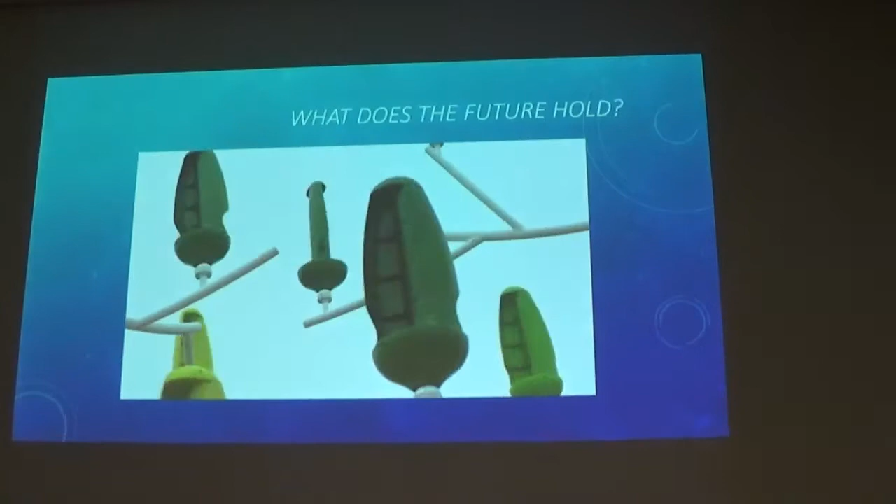So that's one thing we can do. This, I believe this was in France. This is halfway between a science exhibit and an art installation. There are these little vertical green plastic wind turbines, very light, they spin very slowly, and they're on this sort of model tree, and it's nice to look at. So it's sort of this halfway point between a sculpture and a power generator.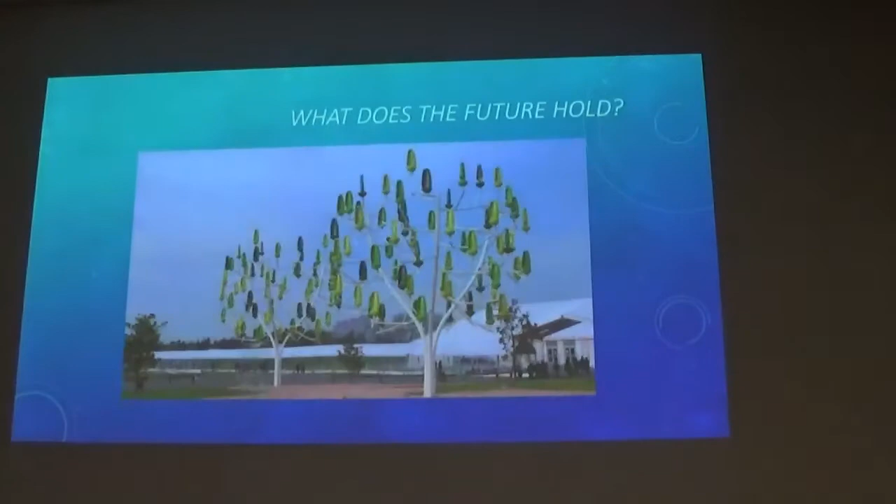And it's just some kind of fun way to do things. I would put one of these in my yard if I could do that, but it's sort of fun little things that towns or cities can do to sort of get some attention and also maybe power some of the lights in a park. If you have LEDs, which are very low on power usage, you could conceivably have these power those. There has been, I don't think anyone's doing it yet because it is very high cost, but...

There have been ideas to put solar power stations in space. Just have solar panels upon solar panels on a satellite that stays up in space, in the sun all the time. There's no dust, there's no clouds, there's no storms, there's nothing. It's just, there's no night.

It's just always staying in the sunlight, and it would theoretically beam down maybe a microwave or something like that to a receiver that would be able to convert that into actual usable electricity. It would probably have to switch which receiver it's going to as the Earth goes by under it, but it's always up there and it's always getting power. So that's an option.

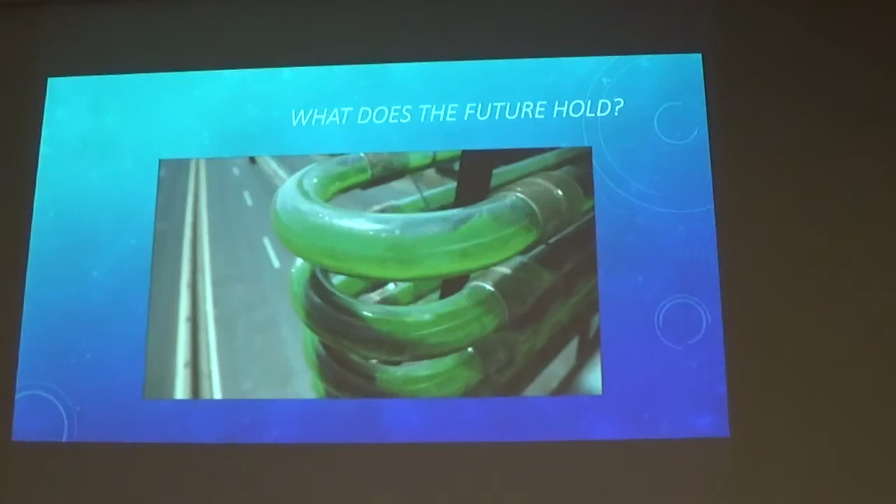Algae, surprisingly, has been conscripted. Algae is a very small plant. They've genetically engineered some kinds of algae to produce oil, not like black crude oil, but more like olive oil or vegetable oil that you could extract and burn if you wanted to. They have reactors that sit out in the sun, because algae needs sun and air, so you could theoretically be cleaning out the atmosphere of carbon dioxide we don't need so much of, and turn that into usable fuel. It's still very early on with that technology, but it's something people are pursuing.

I believe the next one, so, yep. So who saw Spider-Man 2 back in the day? This was like, I was just the right age for this to be the coolest thing ever. Dr. Octopus in this movie was attempting to make a fusion reactor and a fusion generator with a self-sustaining fusion reaction in it.

So when you mentioned plasma earlier, plasma is gas that's so hot that the atoms don't really work anymore and the electrons are kind of just all over the place. It's a charged gas, so it responds to magnetic fields, and it's very, very hot. The sun is made of plasma, and fire is plasma, a lot of things that you're not quite sure what state of matter they are, solid, liquid, or gas. Sometimes it's plasma.

So the way the sun gets its energy is it crashes two hydrogen atoms into each other. Atoms don't like to touch, they don't like to go anywhere near each other, they're mostly empty space, so to squeeze them together you need a lot of pressure and a lot of heat to get the energy required to do that. But when that happens, it lets out an absolutely obscene amount of energy, because if anyone's heard Einstein's E equals mc squared, if you convert matter into energy, even a tiny bit of matter gives you a lot of energy. So that's what's going on in the sun.

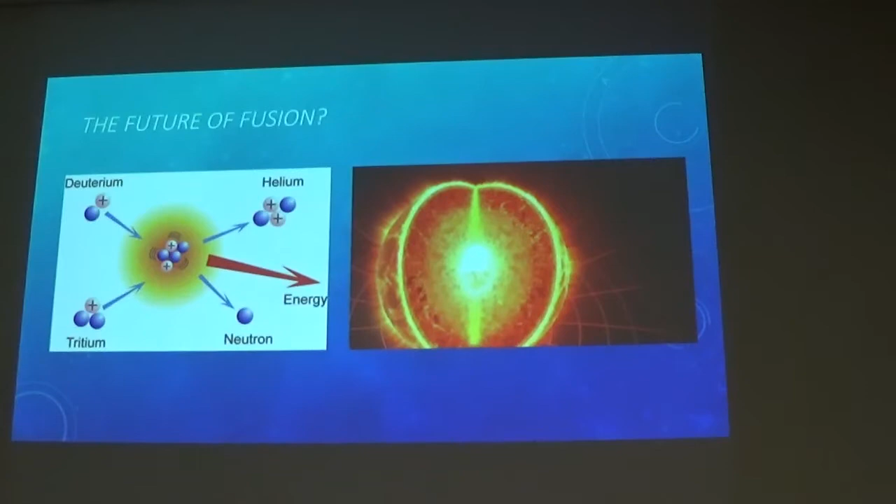That's why we need the magnetic fields to provide that pressure, or the lasers to keep everything focused in there. But as long as you keep the hydrogen there and you keep the bottle holding the plasma away from your machinery, it will kind of keep going on its own. We haven't gotten to that point yet. Our technology is not there.

We can make plasma, that's not hard. The problem is that we're trying to get more energy out of it than we're putting in, and that is hard. Because currently, we're basically just dumping energy into it and saying, it's a plasma now, that's cool, but how are we going to get power from it? So that's what they are trying to do with the fusion reaction, is get more out of it than they're putting into it.

So that's kind of sort of what we're talking about when we say renewable energy, and sort of where we're going in the future. And that's about all I got. So if anyone has any questions, now is a good time.

Yes, yes, okay, yeah. I was taking questions during, so yeah. Two questions? One. This is a single part question. The other one's... uh-oh. So I've heard some powerful people who theoretically have access to lots of science advisors...